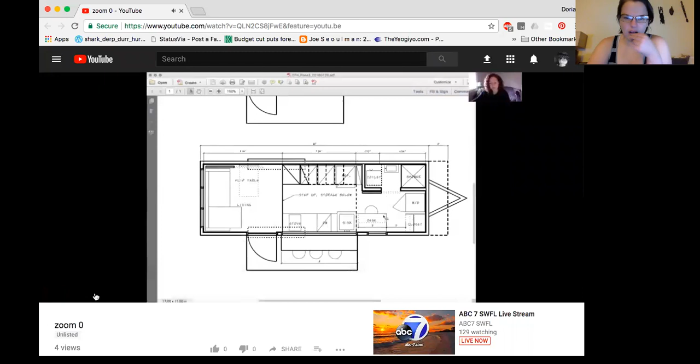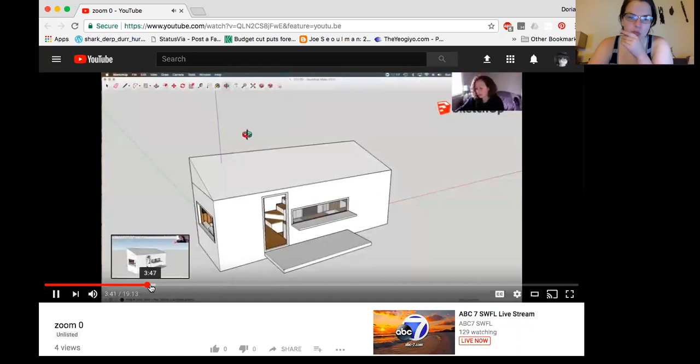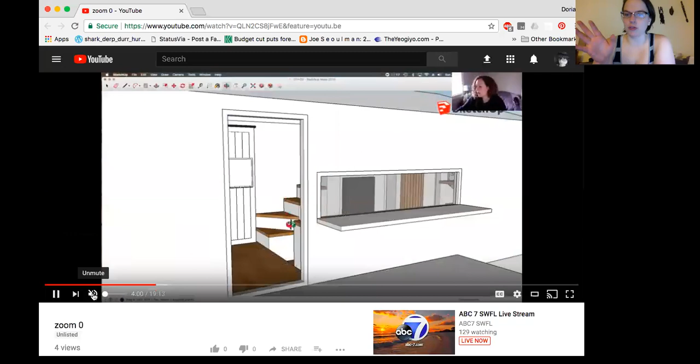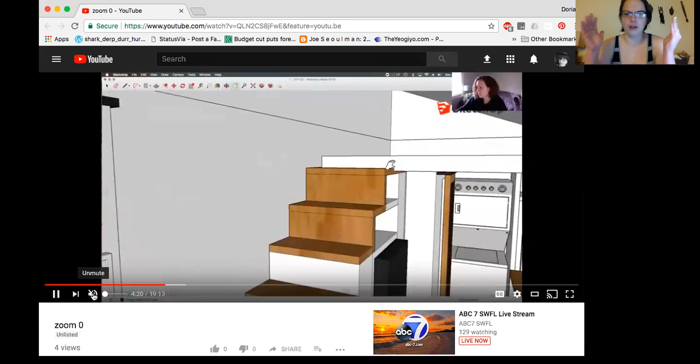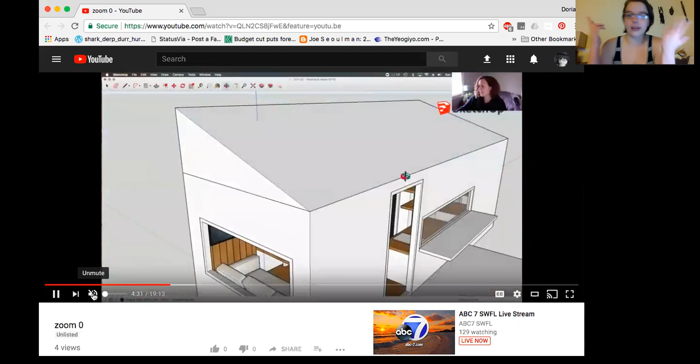Okay, so about the roof, I really want to have dormers on both sides over the loft. I know that that's the harder way to do it. But if it's doable, even if it's a little bit more expensive and takes a little bit more care, I feel like that's something that I do want. I'm happy to have the other side slanted for the solar panels, but I really do want a double dormer on the loft side. I just feel like it makes it more of a bedroom and less of a closet that you sleep in upstairs. And it also allows you the ability to have two skylights, kind of one on each side of the dormers. So that's my thought on the roof.

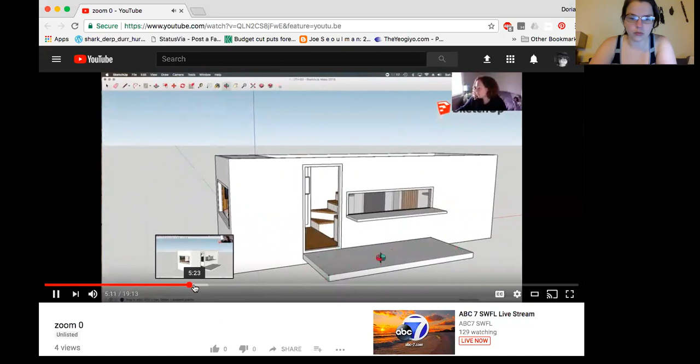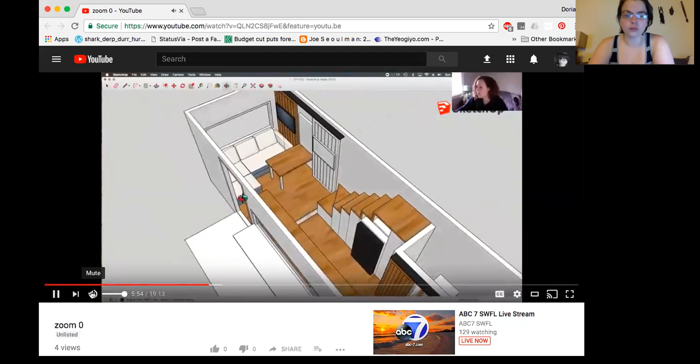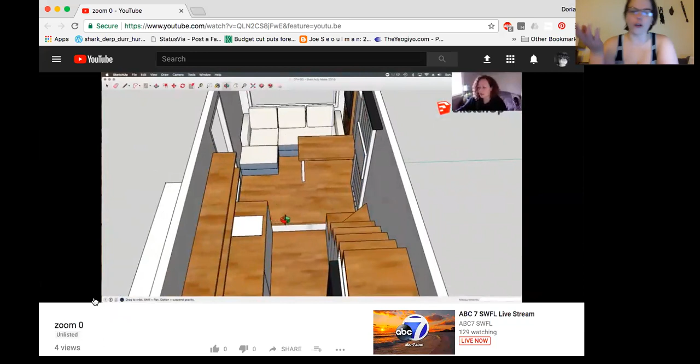Okay, so you're talking about how it's the living room that's raised up. I am curious about how much it's raised up, like how many inches. But also, yeah, figuring out how to access the storage that would be under that would make it worth doing. Otherwise, maybe you make it, maybe the middle part isn't, like, I don't know, there's stuff to talk about as far as making it accessible. I definitely don't want to have hatches all over the place that I have to pull up to get into the storage underneath, but the storage underneath could also be something that's accessed from the outside.

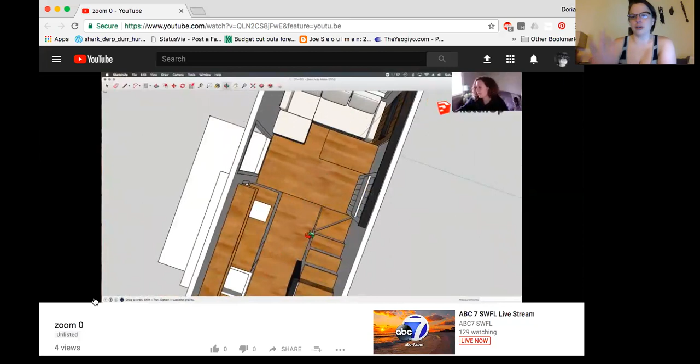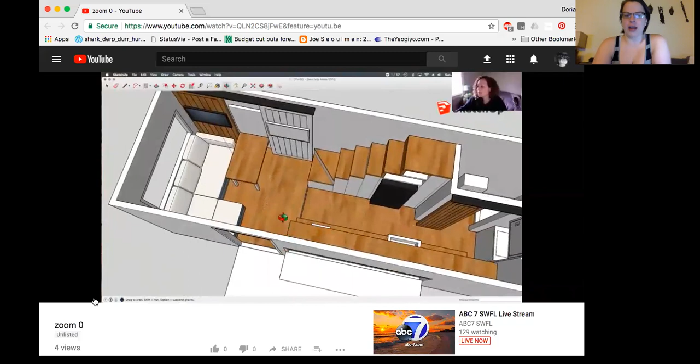That's stuff that I literally hardly ever use, and maybe the drawer thing for the middle part, but the other two are places to slide in fold up chairs and just other kind of shit that I don't need very often. But I think that the ability to access storage is as valuable as having the storage, if that makes sense. Cool.

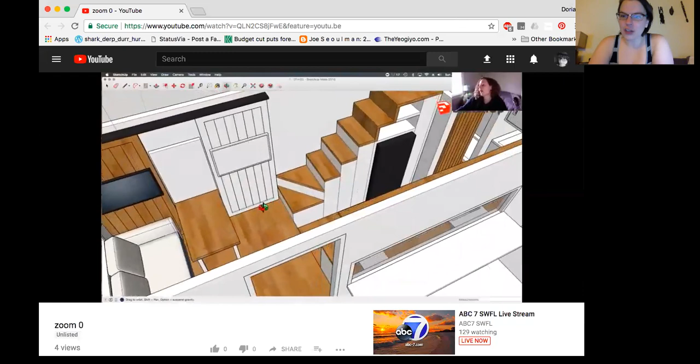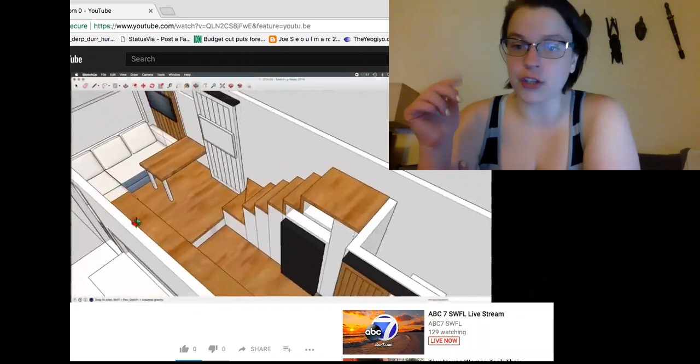And then you were saying that, and so I get it that that's the first step up onto this, and that this is 1 foot 8 inches. And I measured the enclosure that my cat's cat box is in now, and it's 22 inches from floor to the top of the enclosure. So that's another inch on either side.

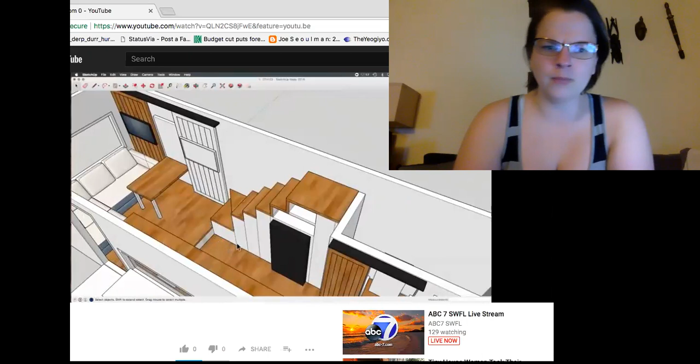So I actually think that a 1 foot 8 inch enclosure would be fine, as long as the plastic box with the little sides itself fits in there. So I can do an extra measurement on that. But I feel like you should be able to handle it in that amount of space, considering the space that he has now. But maybe I also need the width measurement on that. Yeah, so that's that about the cat box.

I like how I keep considering my cat and all this.

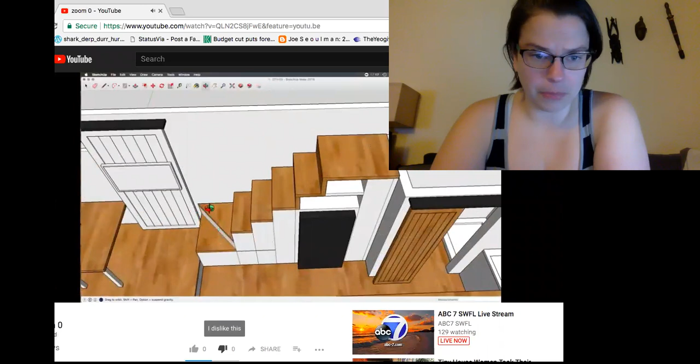And then we can put a lid on this stair, make that usable underneath. I am not sure where you want to put the convection oven. Oh yeah, and then about the convection oven thing, I'm thinking we could just go ahead and put it under the stove top, as though it was a range, a stove and an oven underneath.

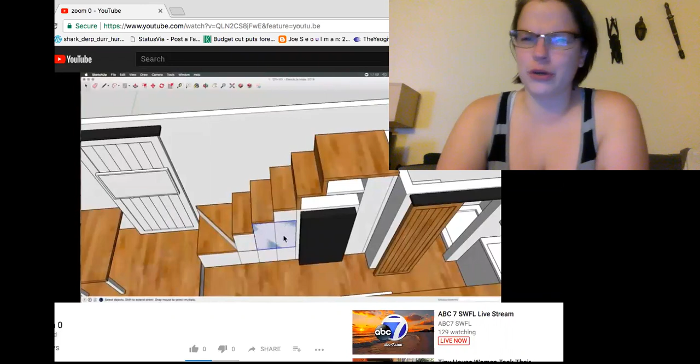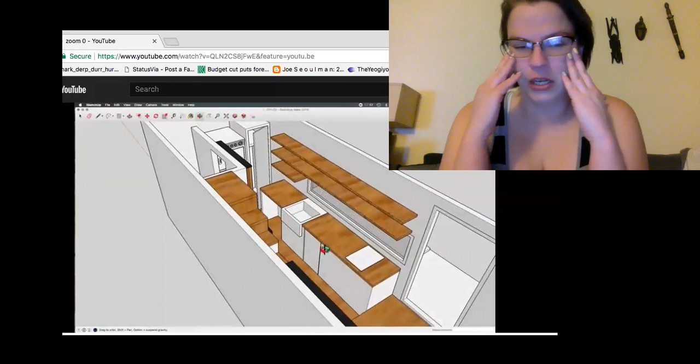I'm not sure if that is more practical or provides more options than just having a small actual stove oven unit and just foregoing a microwave. But I feel like I also am going to need a microwave every now and again. So maybe just putting the convection microwave underneath the little stove top is totally fine.

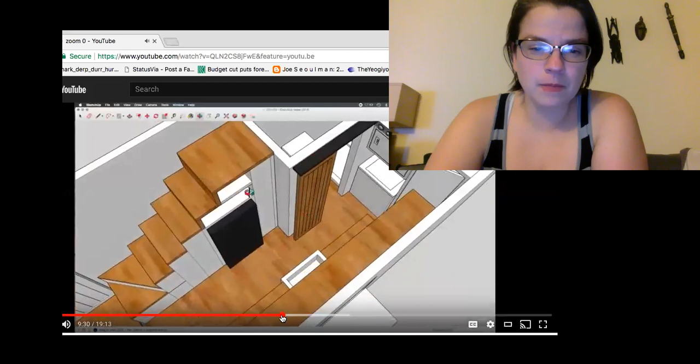Height, then I might suggest putting it over here, and we can definitely make that fit. But if you don't mind it lower, it would cover. The door, one thing, you asked me what my opinion was on some of the things that we have going on here, and I really like the layout, except for you had mentioned a built-in kind of banister. Oh, okay. Now that I understand that that's going to be like a step up there, yeah, the little banister thing doesn't make sense there. I wasn't picturing it in that way.

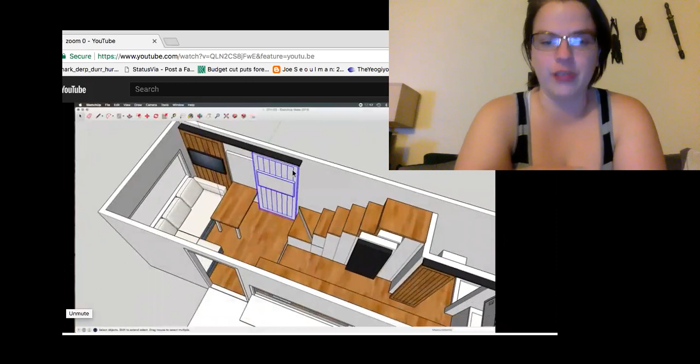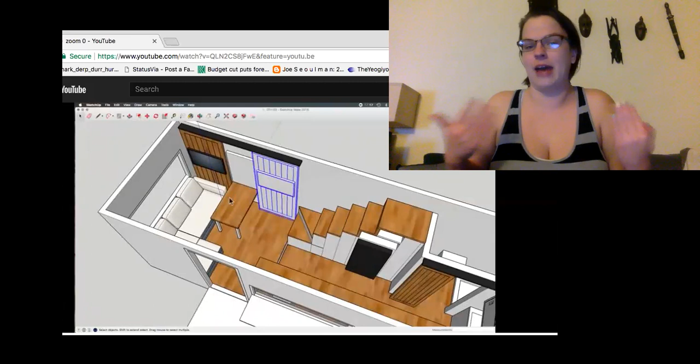Also, with the barn doors, I wasn't picturing mounting the TV on an actual barn door. I was just picturing mounting it on something that's on barn door casters so it can be moved back and forth. So definitely not a full length one like that, but maybe one that hangs down to the top of the table, or the top of the second, third stair or whatever. That sort of frames the TV and makes it stable to move it back and forth. And I also like that it is possible to hide the cord and make it go up in the track up top.

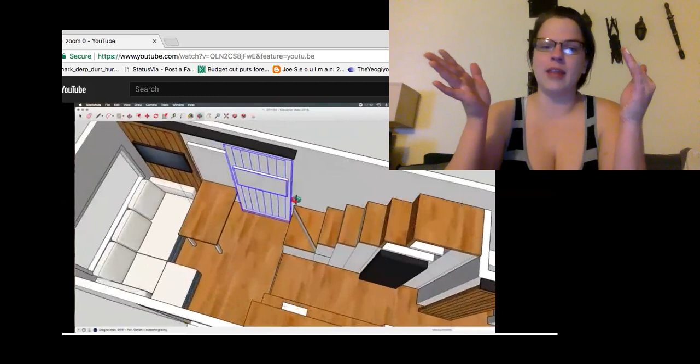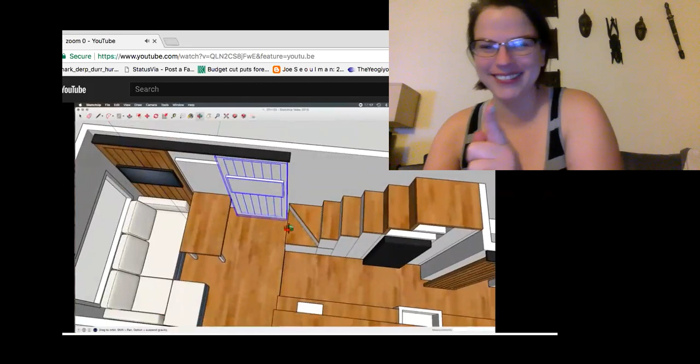But yeah, no, it does not need to, because the idea would be that whether or not the table was up or down, you could move the TV side to side. So that's the point, the whole thing should slide over the height of the table. Across, so that it's more like just a panel that's moving. You don't really need this extra length here. And exactly. In that case, you could build out the step a little bit more and still be able to step on that piece that comes out.

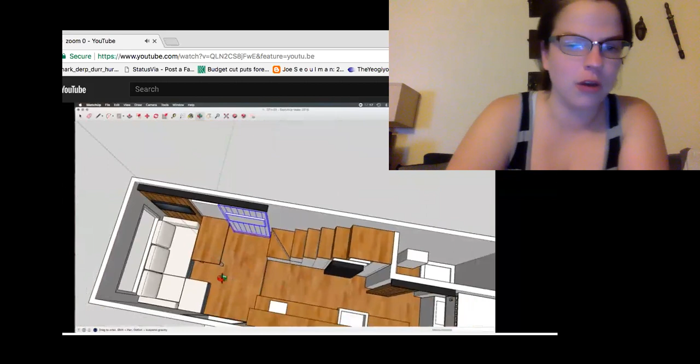I'm just not completely sold that a built-in piece here in this location is going to be the best, because it's going to kind of impede this. Yeah, now that I understand what's going on here, the built-in thing we don't need. Circulation zone. If you had something like a bench that's movable, that you could bring in and out and move around, then you have a little bit more flexibility. You can make that seating, or you can open it up if you have people over, so you can put stools in.

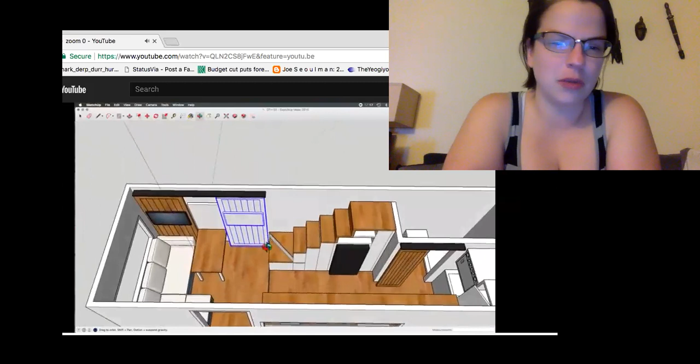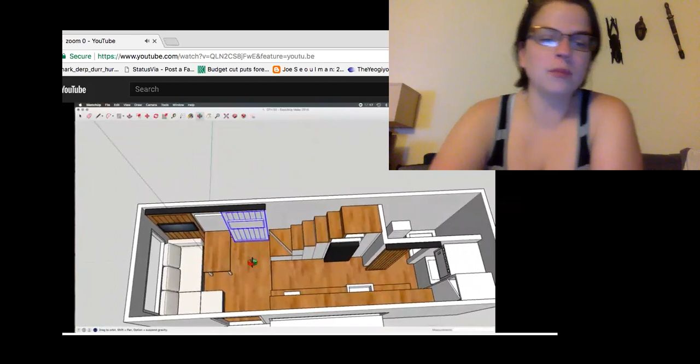Yeah, I think maybe little storage ottomans or something that can also be pushed up against the wall when the table is up, or under the table or whatever. Whatever you want. I personally think that having stools that you could put storage under, that are movable, might be a little bit easier long term. Yeah, totally. I think that too.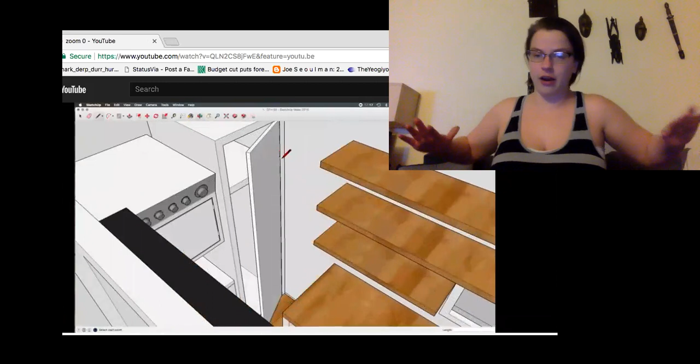But also regarding the full length barn door here, once you get rid of that part, the couch and the arm, in whatever way it's going to be done, can go flush against both walls. So whether that means that we custom build some sort of arm tables there, or if the couch has arms, it'll go wall to wall. Get nice light in there.

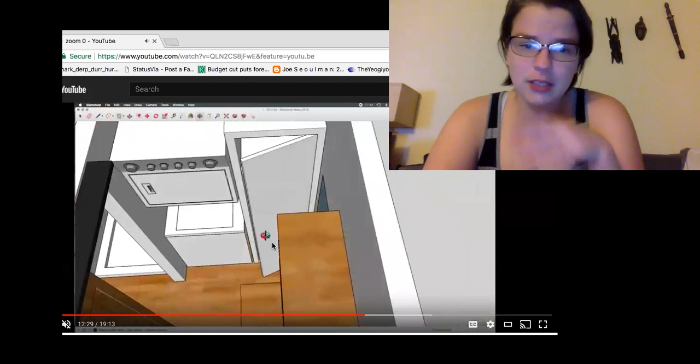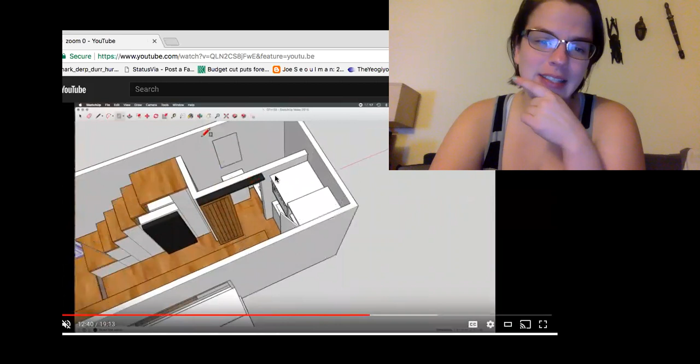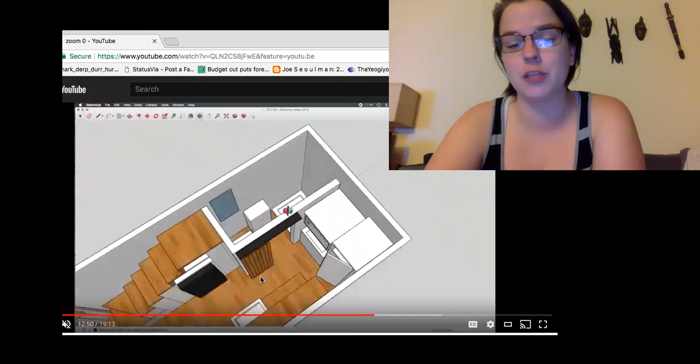Okay, so the thing about this area, I'm still not sold on it. I feel like the washer dryer is just too prominent, which I hate. Could we try putting the washer dryer, instead of the desk, at the end of the sink so it cuts off the space on that side too? Because the other thing is I'm worried about how much space is between here. It's only 24 inches or something, and that leaves you no fucking space to actually get dressed and blah blah blah.

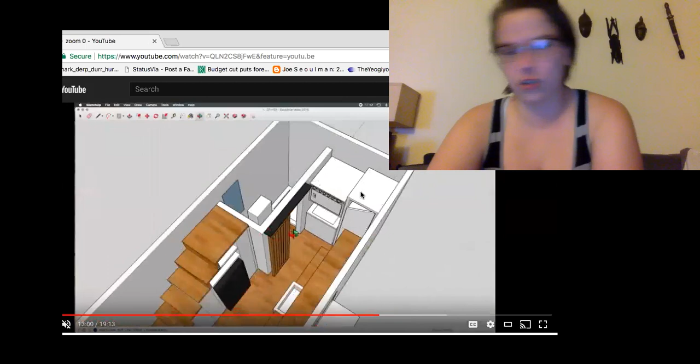So now I'm like, let's try some more configurations with this, because this is the part that doesn't excite me. I like this, I like the living room, I like how a lot of it looks, but this part I feel like we are failing ourselves in some way. I feel like there is a better way to configure it, and we just have to figure out what it is. So there's a challenge there. I think that

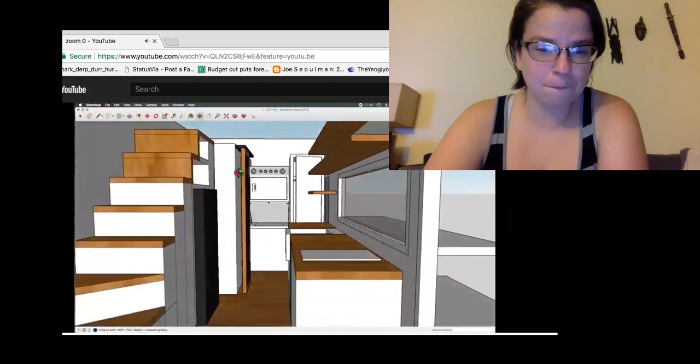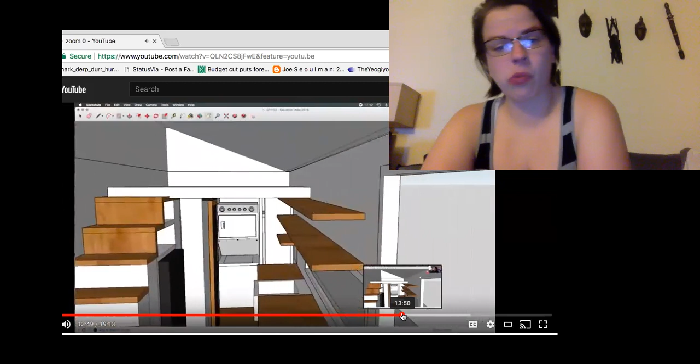Let me go in and then unhide everything. So you can see the loft level up here. It's at 6'8". I was also thinking that we might want to add a little shelf above the door. Yeah, I think a high shelf for Kitty Cat to walk across. Also, don't forget about the exposed beams that cut across the space that he'll probably also walk across, but that I can also hang stuff on and maybe figure out a way to pull a bike up. Maybe the bike pulley thing is up over the stairs, something like that.

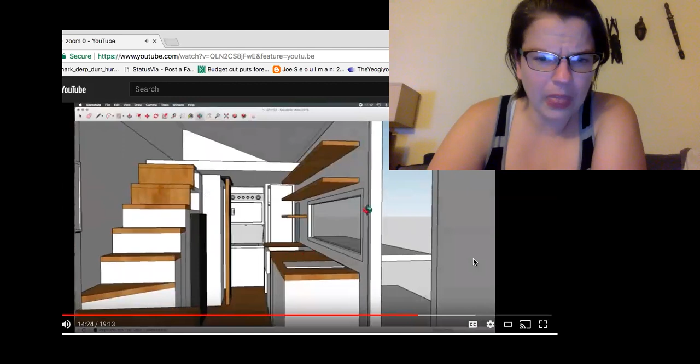I don't know, I guess that doesn't matter, but yeah, so this is kind of what it looks like with the roof on. Tell me what your thoughts are for a storage unit. It should fit a king size bed. Yeah, so like I said about the top, I definitely want dormers up there so that it feels more like a bedroom and less like a closet that you crawl into to just sleep. I want to show you, this is looking out the other direction. I want to look at different types of windows when we look at the elevations.

Oh yeah, so the windows on the back, I'm totally down to have three long, tall windows there. I think that's totally cool. I think that's the best. Hopefully structurally that'd be better because there would be beams and shit between them, but also I aesthetically sort of like the way that looks. And yeah, I think that structurally it'd probably be a lot better when moving it and whatnot. But yeah, so I'm down to have three tall windows. Elevations, and do all that together.

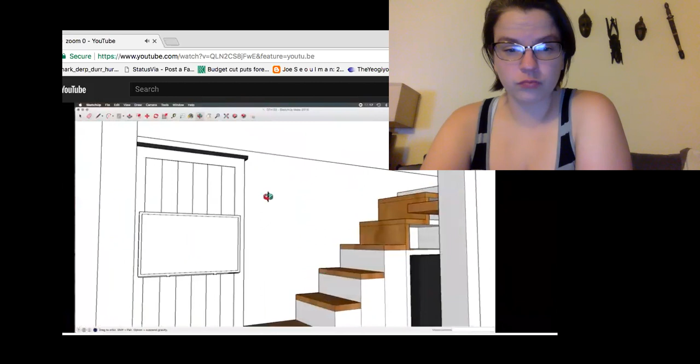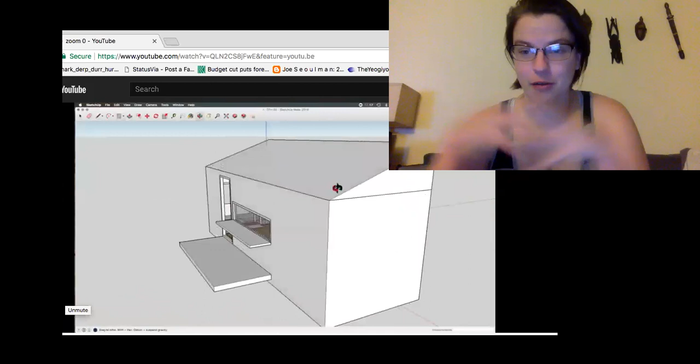We also probably want to add some windows on this side, but it's up to you. We could add another window up here. And then in the loft space, a skylight up here for egress. Totally easy. Yeah, so I'm even thinking with dormers that there's double skylights, one on either side of the dormer. And then there's also windows on the side. I don't know if that makes it structurally not sound or just more difficult, but I'm happy to have that be more difficult. Anyway, let me know your thoughts. I just wanted to run this by you and show you what I have going on.

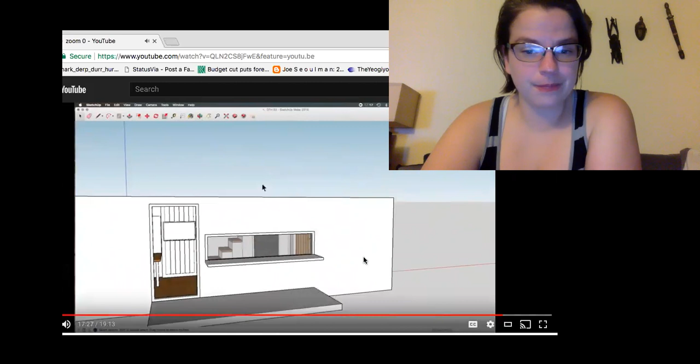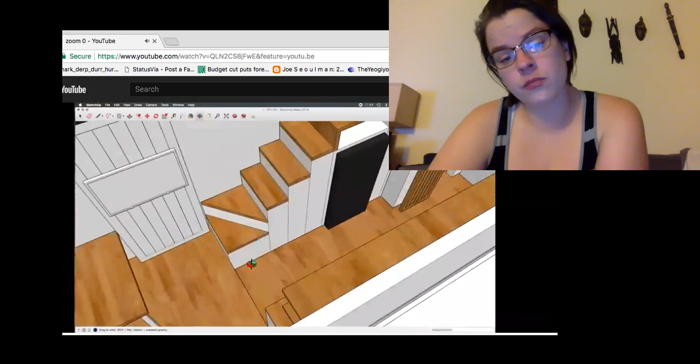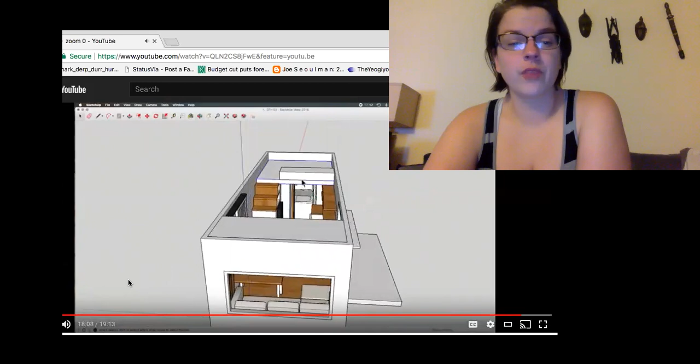Yeah, so I think understanding the layout of the stairs is important. Yeah, I get that now. Maybe you can see that this is a step up. If you don't like that, that's totally fine. We can pull these stairs down. It'll just increase the height of each stair if we pull it down so the first step is level with this platform. But if you don't mind it, I think you're going to get a little bit more usable space out of this double height drawer right here. Yeah. So that's what we have going on. Yeah, cool. I think that's pretty much it.